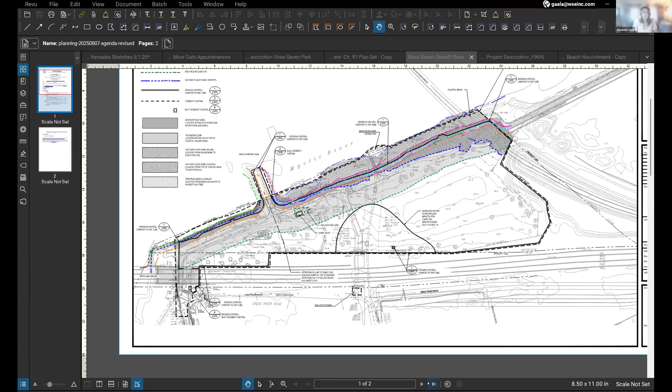Sorry, hold on. This is the existing conditions. The proposed conditions is this plan right here. So we'll be making improvements to the parking lot, amenities, utilities to the dam, and incorporating universally accessible pathways that connect to the existing Alfred Street extension path and will also connect to the future pedestrian bridge that will cross the Mystic.

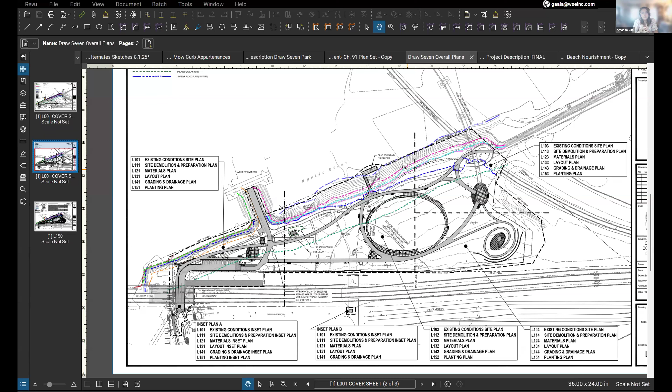But the beach nourishment, which is what we are here for today, will include cleaning up the debris on the beach, which will include glass, bricks, and some concrete blocks out there, and replacing what is removed with the appropriate grain size material that will match the existing site conditions. We did a preliminary particle size analysis that was conducted during the design, and a robust sampling program is proposed and will be the responsibility of the contractor. This will include taking samples of 6 different survey profiles along the beach, and each profile will have 3 samples taken just to make sure that we're matching the existing beach material. So that will be happening from the high tide line, which is this cyan color, and below.

So any questions? This is the first time something like this, I think, has come before the board in a long time, which is fine.

Steve, is it to approve a signature or is it to approve the plan? I think it'd be to approve a signature in accordance with Chapter 91 of Mass General Law. Does anybody have any comments or questions for Ms. Gall? Okay, seeing none. This is not a public hearing.

This is pretty straightforward. We would like draw 7 to be cleaned up. So the chair moves to approve the signature pursuant to Chapter 91, seconded by Amelia.

Steve, can we have a roll call? Jahan Habib, Aye. Michael McNeely, Aye. Lynn Richards, Aye. Amelia Aubourg, Aye. And Michael Capuano, Aye. Thank you.

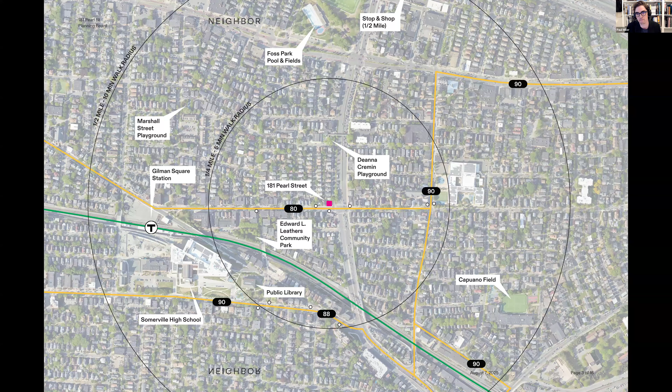So what we're proposing on this site, which is zoned MR3, is three residential apartments. The building is three stories and about 3,600 gross square feet.

At the beginning of the design process, we began by looking really carefully at the site, given that it's quite tight. We really wanted to create something that was a benefit to the neighborhood, given the high visibility corner and sort of the lack of street amenities like trees and plants at this corner.

So we've wrapped both Dana and Pearl Street with a planter that Curtis from Ground is going to talk about in a little bit. We also added a street tree on Pearl Street, and beneath that street tree, a bench which is built into the planter and kind of extends the stoop culture that we see throughout Somerville.

The entrance into the site is off of Pearl Street. We wanted to make sure that anyone could access this building. Ramps are required in the Somerville zoning code, and also a zero-step entrance into the building. So rather than having a separate ramp and stairs, we felt it would be important to integrate the access into just a single ramp. This ramp comes off of Pearl Street and leads to a small courtyard entrance into the building, where there's a small lobby with bike parking for residents.

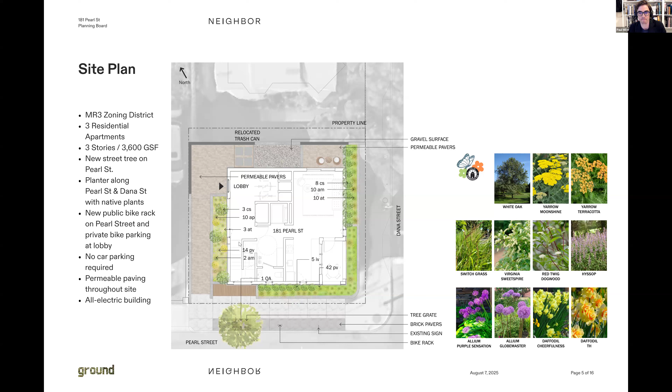This is a view of the project from Pearl and Dana Street. The primary cladding material is an aluminum panel in a color called silversmith, which picks up the color of the sky and the neighborhood around it. We wanted to use aluminum as a kind of robust material and use it in a contemporary way, given the context around the building, the proximity of McGrath Highway. We wanted something that felt kind of robust here. But we were interested in picking up on some of the cues throughout the neighborhood.

So we see this triangular profile that we've selected as a kind of contemporary interpretation of clapboard siding. Here it's run vertical, but you still get the kind of shadow lines across it that you would see on clapboard siding. And as we've carved away balcony spaces for each unit, we're using a mint green color that picks up on some of the plants in the planters and the new street tree. You see in the foreground, as well as on the site walls, a red brick cladding on the planters and those walls that picks up on the red brick planters you'll see throughout the neighborhood, as we're showing here in the lower left-hand corner.

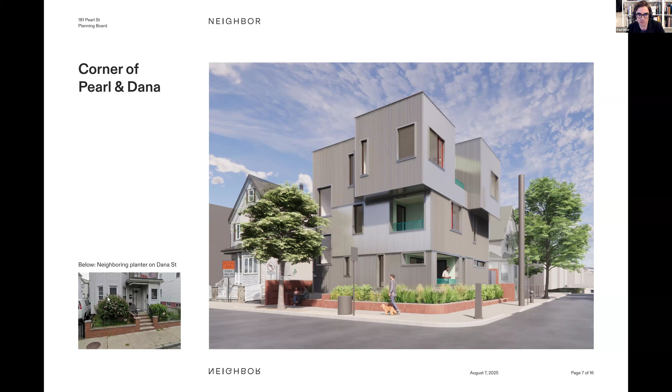This is a view from Pearl Street looking towards the entrance. You can see those site walls that I was just describing, and a copper colored metal panel that serves as an accent on this entry sequence into the building.

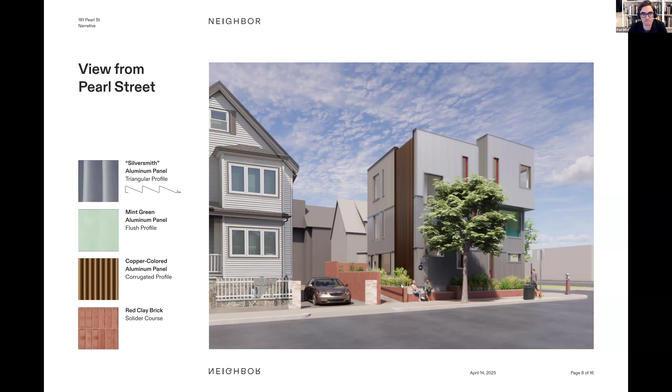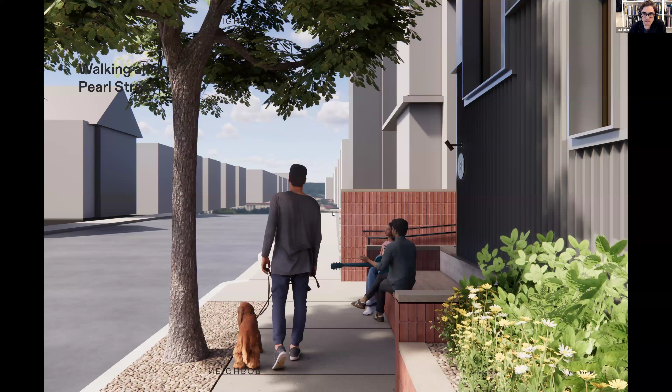In a close-up view of that entrance, you can see the bench that I was describing earlier and a close-up of the ramp. Just another view of that entrance off of Pearl Street.

I should also say that the property line for 181 Pearl Street runs down the middle of the Dana Street neighbor's driveway, and our clients felt it was important from the beginning of the project to allow them to keep their driveway. So we started our design project from the edge of that existing driveway.

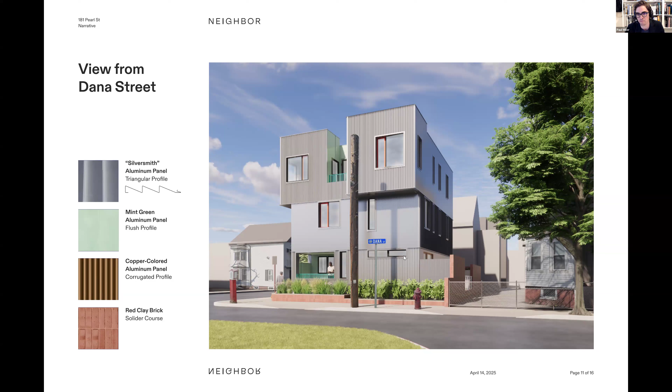Just some details on the facade. We created a break line at each floor that the windows and cladding are aligned with, and we're bringing color into the material palette with the guardrails and the sashes of the windows.

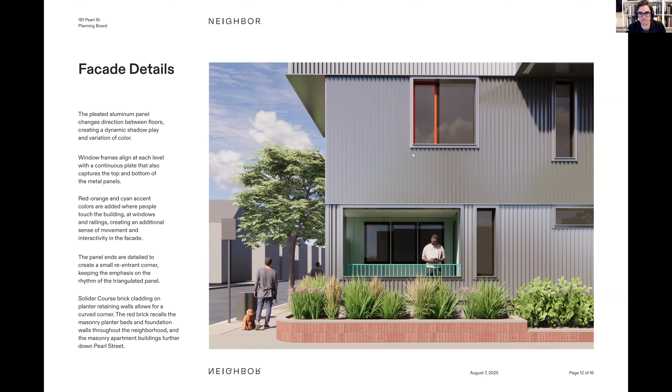I'm going to hand it over to Curtis from Ground to talk about the landscape design. Thanks, Paul. Curtis Puncher from Ground Landscape Architects, speaking at 181 Pearl Street.

100% of the trees, shrubs, grasses, and perennials on this project are native. As Paul mentioned, we are wrapping the building on 3 sides with planting, to soften that pedestrian experience along this section of the streetscape.

There are bulbs in here as well, for early spring interest. So they do deviate from the native palette, but they're sort of isolated in their seasonality.

Elsewhere on the project, we have permeable paving planned north and west. There is a sunken gravel surface planned northeast, on the top of the page, to allow light into a lower unit. So all of the hardscape surrounding this building is permeable, and we'll revisit that when we talk about the green score.

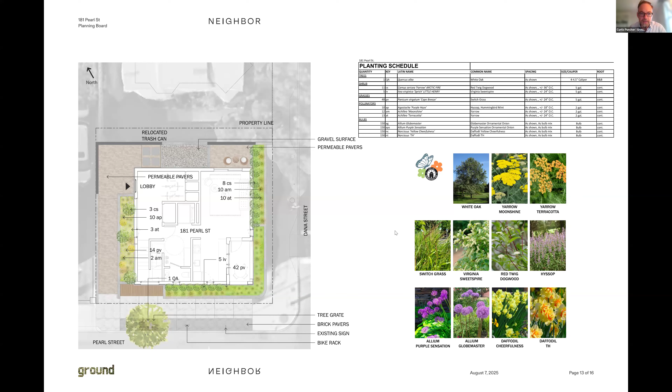Here's just a closer look at some of the species that we're using. Again, all shrubs, perennials, and grasses are native, as well as the tree, of course. Next slide.

Just a quick look at some of the details here, as well as getting into the green score. Our target for the project is 0.3, and we're achieving a score of 0.33.

To get there, we're looking at the soil depth greater than 2 feet, and that's achieved in that perimeter planting, as well as the permeable paving wrapping the north and west side of the building.

And the species that we are using will grow more than 2 feet - a good portion of the species we're proposing will achieve a 2 feet or higher maturity. But there is a portion of ground cover species that will be less than that. So taking all of those factors into account, that's how we get to that 0.33.

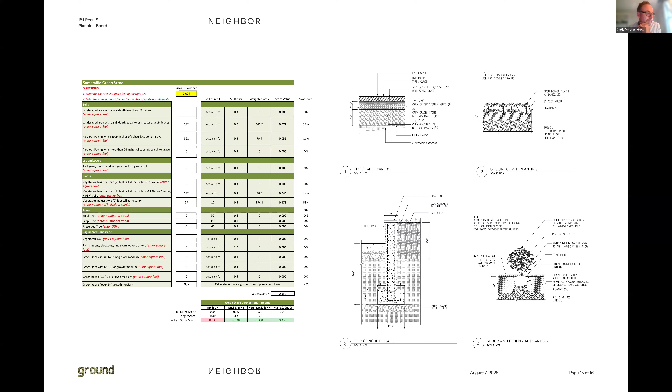I wanted to keep it brief because I want to leave room for questions and discussion. Thank you. Thanks, Curtis. So, we're excited to hear your feedback on this. Happy to take any questions.

Yeah, so right now I will probably open it up to public testimony unless there's anybody on the planning board that wants to ask anything of the applicant or of staff.

Yeah, Amelia. Thank you, Mr. Chair. I appreciate the applicant's explanation and emphasis on accessible and universal design in the exterior and the access to the building. Could you just take us through the accessibility of the interior of the units for a moment?

Yes. So the ground floor unit is also a 2-level duplex unit, and we're providing a lift for that unit so that those levels can be accessed. The second floor and the third floor are walk-up units, so they would not be wheelchair accessible. Thank you.

Anybody else before I open it up to testimony? Okay, so what I'd like to do now is open up this public hearing to testimony for anybody that would like to speak in support of the application. Please hit your raised hand button and I'll call on you in the order in which I see you.

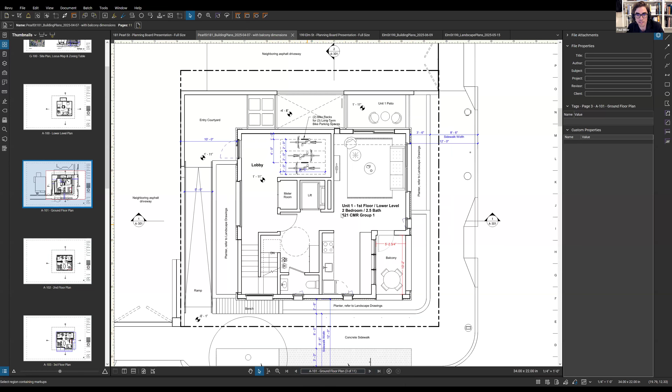The third floor is very similar, except it has bay windows, with the balcony centered between those. The bedroom and bathroom configuration is the same. The first floor unit is the unique one. As I mentioned, it is accessible. The first floor has a generous sized kitchen and living room, and then down on the lower level, there are 2 bedrooms and 2 bathrooms.

The other question I have is somewhat directed to staff. This application, as I recall, is putting in 3 units and does not provide any parking since they're not required to. Do we have our standard condition about residential parking stickers on this?

This is Madison Anthony speaking from staff. I was the case planner on this project. I didn't list that as a condition because mobility didn't list it in their standard condition list for this project for whatever reason. But if the applicant would be open to adding that, I think it would be a great idea. That is a standard condition that the planning board includes when a project does not include parking in a dense residential neighborhood that's close to transit, which this is.

Okay. Yeah, well, sorry, Madison. I was just going to say, I think if the applicant would be open to it, it's a good idea to add it.

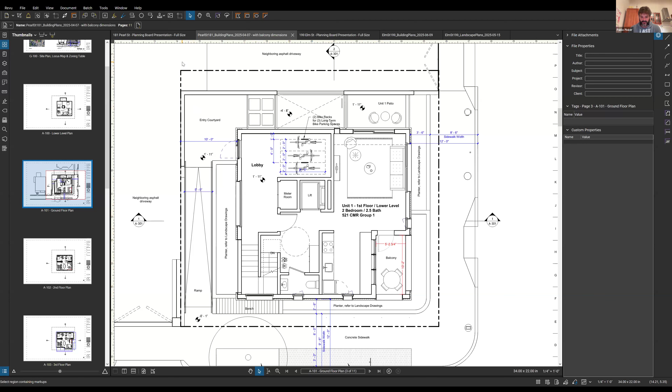I think, if I may, from the beginning of the process we were very aware of the context of the site, close to transit. We all know Somerville well, and that's part of the reason. It was very challenging to get everything that we needed, but it's part of the reason we tried to make the bike parking inside. There were versions of this with parking for bikes from the exterior. We wanted to put an emphasis on safe interior bike parking, geared towards people that are not going to have cars and won't have stickers to park in the street. It was our assumption from the beginning.

That's great to hear, Pablo. Thank you. Because when people talk the talk, I want to make sure they actually walk the walk as well. So I'm going to propose that as an amended condition to our standard list. And I would ask Madison and staff going forward that we have a discussion by the planning board that this should be, in my opinion, a standard condition on new development where parking is not being put in.

Those were my two thoughts. I do appreciate you guys working diligently on a site that's more difficult. I'm not always a fan of super modern designs, but this one is a little bit different in a way that I think kind of works. So those are my thoughts.

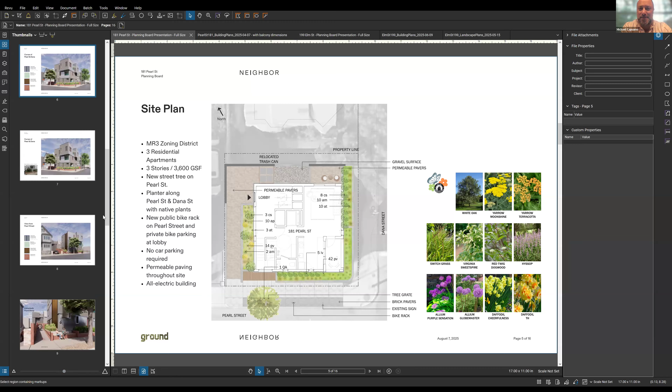Thank you. Who else? And I apologize, everybody, I'm getting over a cold, so if I sound like I've been smoking parliaments in the backyard, that's not actually the case.

Anybody else have any questions or comments for the applicant? Okay.

All right, well, I was not anticipating moving forward with this one tonight, but it seems like we are.

Sorry, Mr. Chair. Yep, Amelia, sorry. I'm sorry, I was just trying to refer back to the submission documents to make sure I had this straight.

I think one of the comments provided by the UDC, and I'm checking whether it's in the recommended conditions for the staff memo, was submission of final materials to planning staff for review. Given the more modern palette here, and particularly the use of color as an accent, I'd love to make sure the planning board codifies that in our conditions a little more bindingly. I don't have any major concerns, but I think it would be good practice, and I thought that was a good call on behalf of the UDC.

I'm just having trouble finding if that's an existing recommended condition or if that would be a new one. Amelia, can you say again what your proposed condition is if it's not already listed? That material samples, including color samples, be provided to staff for final review before construction. I know we have standard language on this, I'm just not sure. To the extent that that is not already listed in the list of conditions, I'd support putting it in. Thank you.

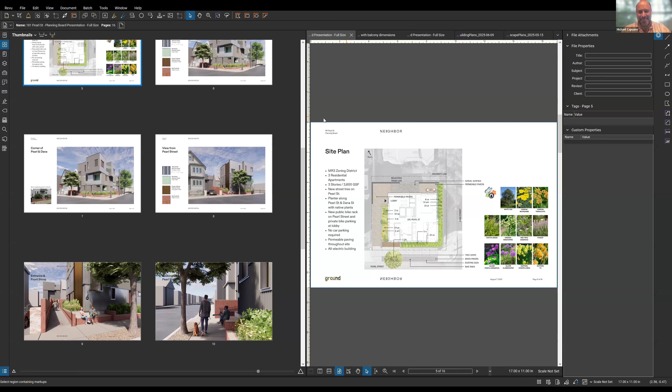Very similar project, 199 Elm Street. Yeah, it's the same team. Just stay on, it is the same team. Same team, yeah. You just tell us when to go. Go. And, in fact, okay, for the purpose of a clean record, please just reintroduce yourselves.

Yes. I was planning on... Good evening, Chair and board. My name is Pablo Picker. I am the developer on 199 Elm Street, and along with Paul Miller, we are super excited for this project.

We have not been working at it as long as the previous one, but we're all very familiar with the area, the context, the site. It's next to some favorite businesses of ours, or not ours, but that we go to and enjoy. From the beginning, we had a fun time designing this building and thinking about the future of Davis Square and the things that are coming, trying to respect our neighbors and the businesses we enjoy going to. We're very excited for presenting tonight, so I'll pass it over to Paul again, and we'll go from there. Thank you.

Thanks, Pablo. Good evening again to the board, and thanks for having us tonight. I'm Paul Miller, principal at Neighbor Architects, and I'm joined by Curtis Puncher from Ground Inc., who is the landscape designer. I'm going to go ahead and share my screen, and we'll start the presentation for 199 Elm Street.

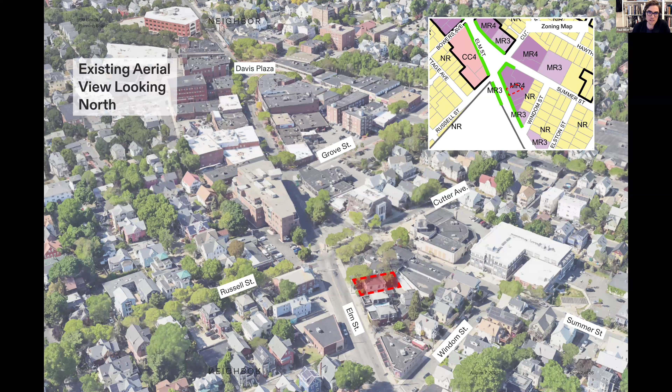Can everybody see my screen again? Okay, great. So you can see the site, 199 Elm Street, highlighted in red towards the bottom of the page. It's on the east side of Elm Street, sort of at the southern end of Davis Square. You can see Davis Plaza up to the north here, and the Davis Square T-stop is right next to that. In the foreground is Cutter Plaza.

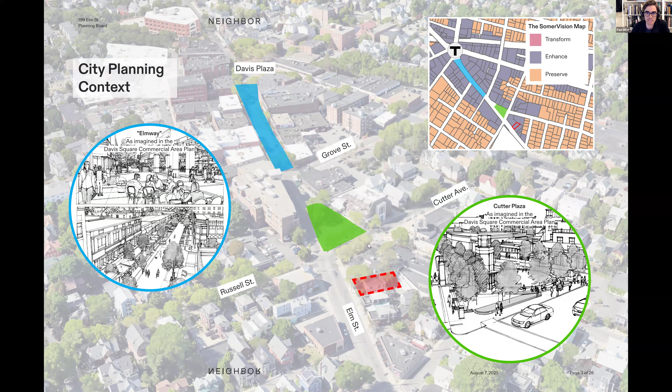We wanted to quickly highlight a couple of the city planning initiatives. These are both from the Davis Square Commercial Area Plan. There's a thought of enlarging Cutter Plaza and enhancing it, and also a thought about reimagining Elm Street in the core of Davis Square as a more pedestrianized version of itself. Our block was identified for enhancement in that vision and has been zoned MR4, so we're excited to be working in this context. We love Davis Square, and I happen to live very close by, so it's an exciting opportunity for us.

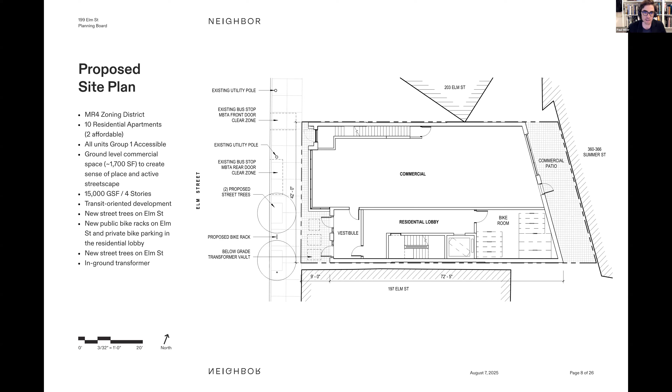So it was important to us to find a place to put it on the site. Also, because Revival has this really wonderful mural, which we'll show in a minute, on the north facade of their building, and a couple of windows in that facade, we wanted to step the building back and create a little courtyard, which you'll see in the renderings, that provides access to the building and helps create a sense of place, building off what Revival already has on the northern face of their building.

We love these murals along Elm Street. We think they're the most prominent and our favorite architectural feature of this area. So in our design, we're interested in building off of the energy that these have and the color. We also want to make sure we're tying into the context of Davis Square—you see a lot of brick, a lot of masonry, and of course these small to mid-size commercial spaces that everybody loves throughout Davis Square.

Okay, so here's a view of our proposed design from Elm Street. You can see we're picking up on the elevation of Revival next door, and that continues down to Daxan and Posto as well. So there's a clear ground story band here that is the commercial space primarily.

We're showing it with folding windows so that it can open up in fair weather, like you see in some places in Davis. Revival has folding windows. If you go down to Diesel Cafe, they have roll-up garage doors, and it's just so lovely in the limited time of year when it is fair weather to be able to open these up.

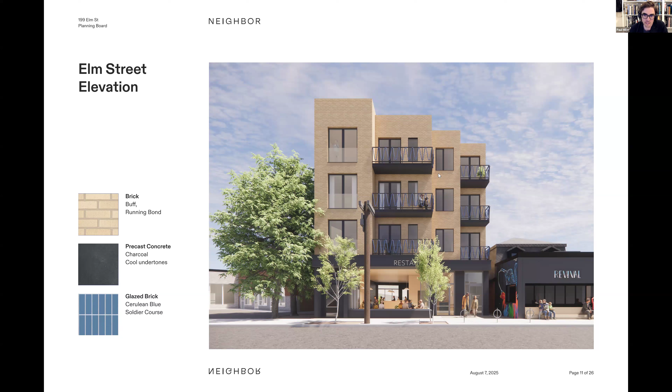The material palette: we are proposing precast concrete at the base, which would be a kind of charcoal color, similar to what you see in Revival. And we feel like that complements the buff colored brick above, which recalls what you see at the Somerville Theater and elsewhere throughout Davis Square.

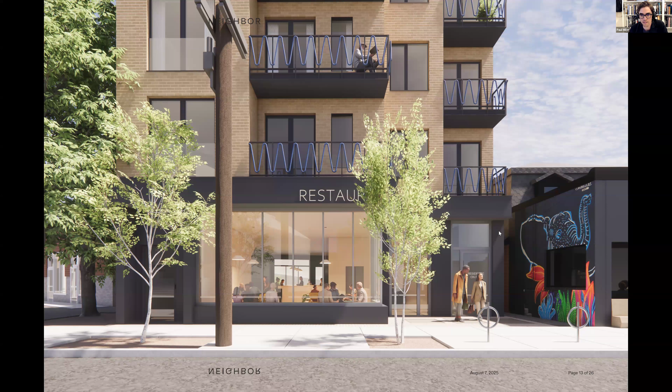There's a close-up there of the ground floor restaurant and the entry courtyard, and we have views, each of these with windows open and closed.

This is a view looking across Elm Street, on the oblique, to describe another important design move, which are the stair towers. We wanted to use those to break down the massing a bit and describe what's happening on the inside of the building.

So we're cladding those in a bright blue glazed brick, which we feel is a nice complement to the warmer buff colored brick that's part of the main massing. That move also breaks the scale of the building down more to a human scale, where you can see the size of the apartments on the outside of the building.

I'll also point out the special permit for what I believe is described as a mechanical penthouse in the zoning code. That's actually the elevator bulkhead, and the reason we need that is because this needs a commercial elevator to meet the code.

We're proposing a really beautiful roof deck that's a green roof and also amenity space, and we're required by code to provide accessible access to that, which means an elevator. If we're going to have a roof deck that's occupiable, the elevator has to go up, and this is the minimum height of an elevator going to that level, about 15 feet above the roof deck.

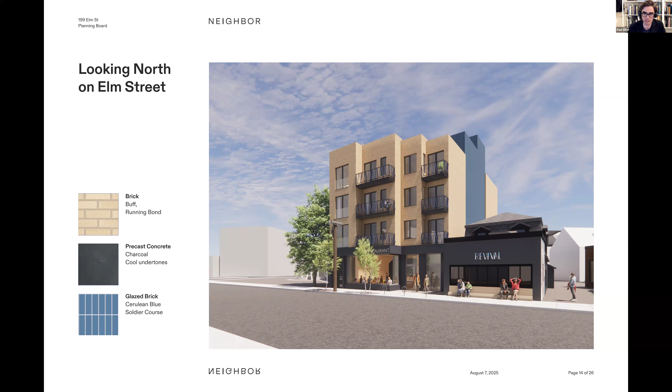So we've tried to hold it as low as we can, but if we're going to have this rooftop amenity, then the elevator just needs to be that tall.

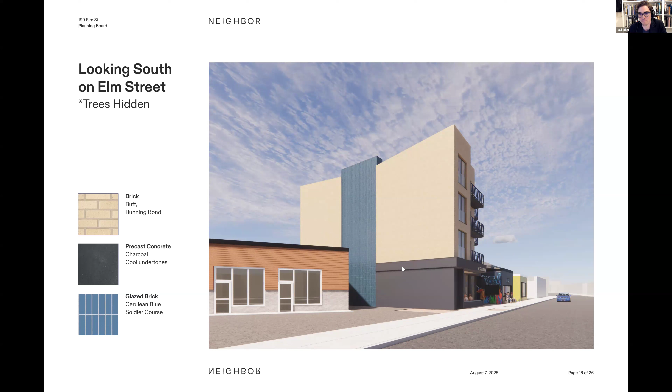This is a view looking south on Elm Street. You can see the other stair tower here. These are existing trees to remain, but just so everyone can see what's behind there, it's a lot line wall, so we can't have any windows, but we are trying to make it as elegant and interesting as we can while it's exposed until the adjacent sites are redeveloped.

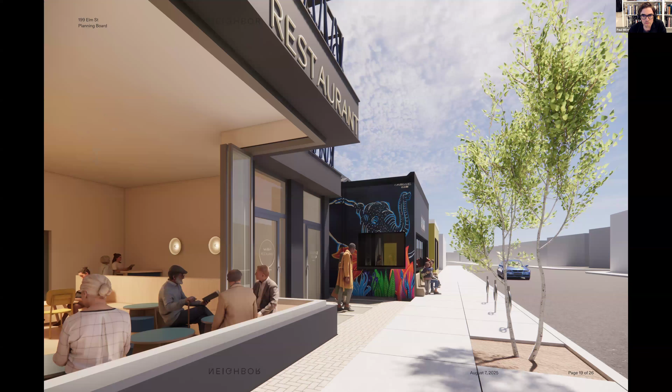Okay, Curtis, I'll let you describe the landscape design. Thanks, Paul. Again, Curtis Puncher, Ground Landscape Architects, 199 Elm Street.

So as Paul mentioned, we do have 2 street trees on Elm Street. There are overhead wires on this part of the street, so we have selected hedge maple, which are on the City of Somerville's recommended species list for this condition.

Inbound of the sidewalk, we do have precast pavers. They are not permeable because there's such limited space, and where there is a setback, we are over that aforementioned transformer vault. We do have permeable pavers in the back of the site, where there's a somewhat generous patio for the ground floor tenant, ideally a restaurant.

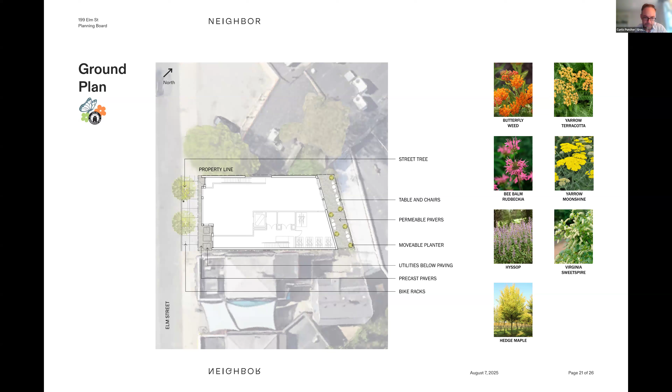The tenant will have a big say in how that site is furnished, but we would like to see planters out there. Those planters would not count towards our green score. Next slide. Our green score is wholly, well, aside from the permeable pavers, the planting portion of our green score is provided for by the rooftop planting.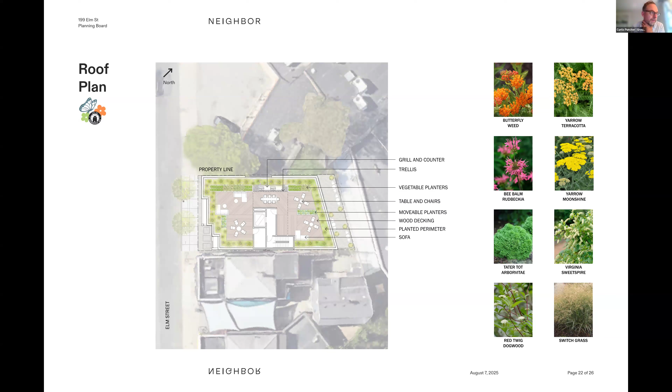Yeah, that makes for a great space, I think. The next slide is a closer look at that plant palette. And the next slide is some inspirational images we've been looking at to inform the space. So again, with that native palette, a meadow feel to it, with the generous occupiable spaces.

And then our final slide here is just to look at that green score again. I think our target was 0.3 and we've achieved 0.357, I believe. And again, that is achieved through the permeable paving on the patio at the back of the site, the 10-inch soil depth growing medium for the rooftop, and a good portion of our species will grow to at least 2 feet tall.

And that's all for me, unless anyone else has questions on that.

My question is, I saw something called a tater tot arborvitae. Is that really the name of it? Yeah, it's a variety of Thuja occidentalis, so it is a cultivar of a native species. It's not the towering, columnar tree arborvitae, it's been cultivated to retain a smaller shrubby form. Funny name. I'll have some comments and things later on, but I just want to raise that one real fast.

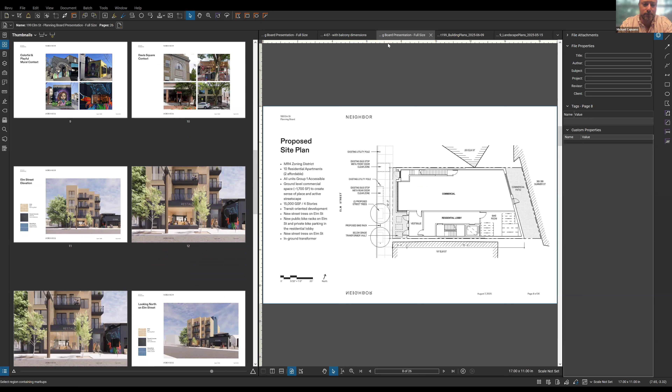Hello, longtime listener, longtime caller, Crystal Huff, they, them, Ward 5. And I am really excited about this project. I really appreciate the accessibility, and I really appreciate the compatibility with the rest of what's going on the street here.

I know that there's no back and forth here, but I joined for this presentation and missed the previous one, and just want to note that I don't actually know what group 1 accessible means, if that's a thing that could be answered even though there's no back and forth. And yeah, I'm glad that you're above the minimum for green score. I do pay attention to that as a resident. I appreciate it, and I'm super excited you're not bringing gas pipes in.

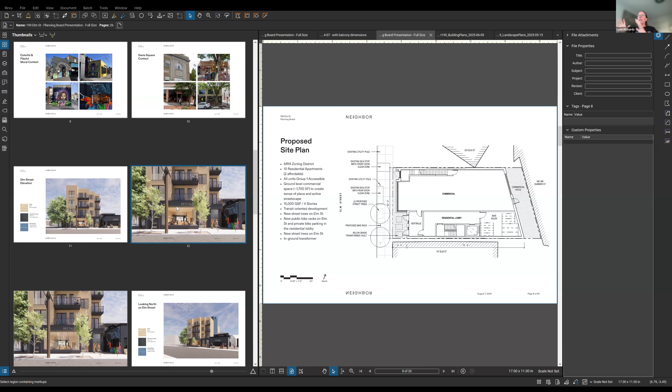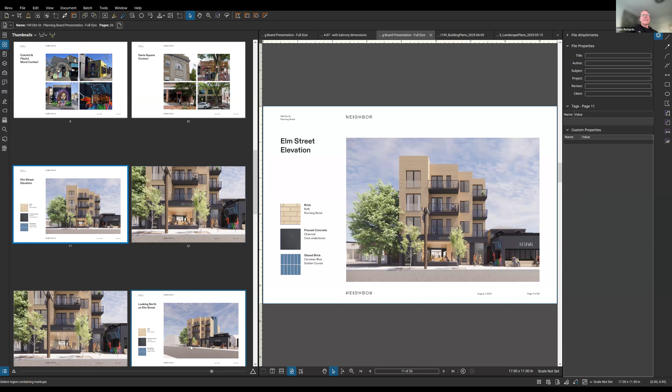And you answered it in part, but I want to push a little bit. When you show the whole building on either side, it's just blank walls. Pablo, I think you said at some point, see, blank wall right there. And then it's also on the other side. Now, the other side, you said at some point in time, somebody may build there.

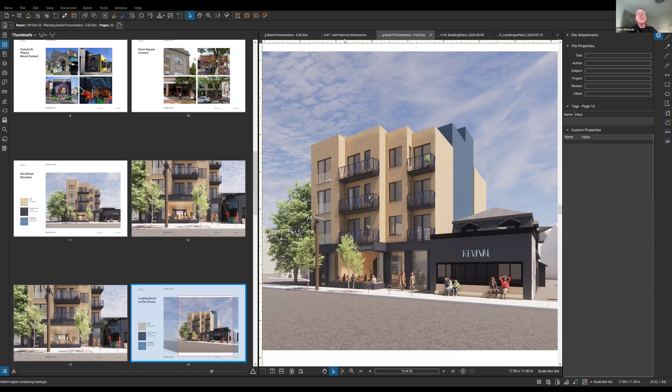That's the expectation, and that may happen when this building is done. That may happen in 10 or 15 years. We don't know. So given how much you emphasized the mural art on Davis Square, and particularly within this stretch of Elm, I'm wondering if you have any plans, or could have some plans, to commission a mural on one or both walls as a temporary use.

Because it's unlikely that this particular wall you're seeing, Revival's going to go up. I mean, let's hope Revival stays there, and yes, it should be bigger, but we're just going to park that for a moment. But certainly on the other wall, what about doing some public art here?

So what I can say, I should let Pablo please answer. Yes, I think that we actually considered just showing a mural on there at some point as part of the design, and I should let Pablo speak to it further.

Well, I think you hit it. Thank you, Lynn, for the comments. We had discussions about this from the beginning, and I think in a sense we played it more in a safe way, thinking about the context of being surrounded by MR4, and that at some point, whether we want it or not, those buildings would come up. So we decided, knowing we couldn't put openings in them, to accent the building with the staircase and the blue, giving it a little bit of that sense of something different, but knowing that it would be covered.

But we even had this conversation in prep tonight. I mean, I love the idea of commissioning a mural. I think it makes no sense not to do that. I agree with you, Revival, we'll see where that goes, but that's going to be like that for a while. Same thing with the other side, we don't know what's going to happen. So I think it's a great way to engage the community, and a great way to pick up on the context of where this building was inspired from. Yeah, I wish I was an artist. So I love the idea.

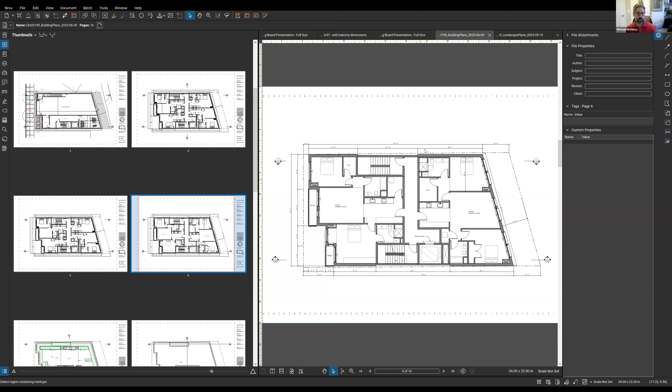And then on the positive side, I also really appreciate that you guys have thought about the use of gas and Somerville's goals here for going toward a carbon-free community. I know when we were considering a lot of net zero policies, one of the big pushbacks was restaurant considerations, and the fact that you guys are being proactive about this and saying there's a market of restaurants and the like that don't need this, I think is awesome. So way to lead the charge on this. I think the city should take note of this because, again, this was a big pushback when they were going through their initial drafting of those ordinances.

So good on you for all that. And thank you for answering the trash questions as well. I always appreciate you making sure you've got, it's going to sound like a terrible pun, wasn't intended, an airtight answer to a problem like trash mitigation and rats. So thank you.

Han, you got anything?

Thank you, Mr. Chair. I think I'm just going to echo all of what my fellow planning board members have said. The only question that I do have, and thank you, Mr. Chair, for the opportunity, is for the applicant team: while I'm very much supportive of the preferred restaurant consideration for the commercial space, should that not pan out, has the applicant team thought about any other commercial uses that they might want to share?

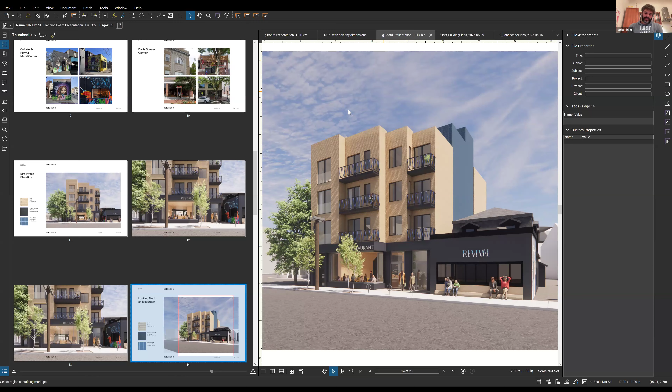Pablo, would you like to speak to that? Yeah, sure. I'm throwing this out there with a big caveat. On a personal end, actually, my partner and I run a yoga studio in Harvard Square.

And early on, we had talked about potentially seeing if this was a site to incorporate a business like that. I know the gym around the corner opened up, but I think our studio fulfills a different niche, so that is one use we thought about. We actually explored various options about including the basement, and then it just became a little too overwhelming and kind of silly, and we were trying to have a balance between the resident and the commercial. So I think there could be a version of that. I don't want to make this about us, but that's something we've thought about. But something similar to that type of business, I think, could work really well here.

Personally, I wouldn't, I think retail is not so successful. I feel like something that speaks to the neighbors and the context, but what do I know? I'm more going from the heart there. But yes, we've talked about that if restaurants weren't something that worked. Sure, thank you so much for that response. I understand we're not seeking to predict the future here, so I certainly appreciate your consideration. That's all I have at this time. Thank you, Mr. Chair.

Everybody's kind of brought up some of the issues and questions that I had, which is good because it means we're all generally on the same page with where we think the project can be made a little bit better.

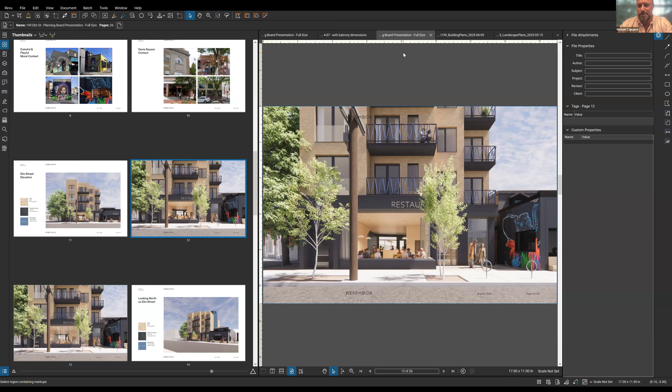So great, thank you. We'll come back next time with some options that show the top of the building definition there and a mural. I think we're in a good place to hopefully move forward in two weeks. Terrific, okay great, thank you chair. Thank you, board. We will see you in a couple weeks.